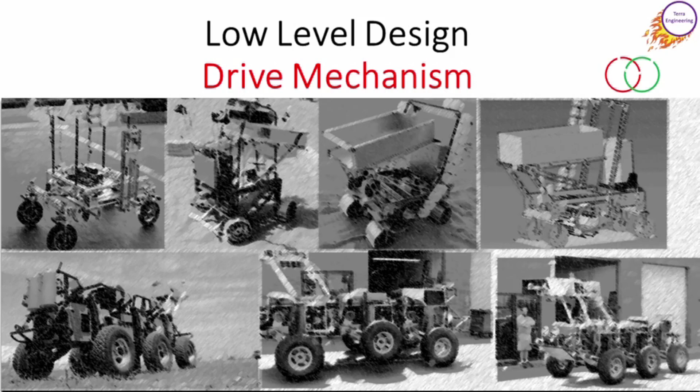This is an introduction to the internal drive system for an omnidirectional drive BattleBot.

The system I designed is based really off of two parts. The first is this 6384 motor. I have a number of these sitting around, and the second is this, which is the internal piece of a clutch system I had for a much larger robot. It was actually around 4,000 pounds. Now this started out at 8 pounds, and I put it on the lathe and turned it down to see just how light I could make it, to see whether it might be viable. And I really did remove a ton of weight. So I'm going to try, based on this clutch system, to fit the design around it.

All right, let's get into CAD. This is SolidWorks, obviously. There's the two motors, twin motor design. They say they're 4,000 watt, but it's Chinese 4,000 watt, and if you know what that means, you'll be lucky to get a momentary peak of 3 kilowatts out of them. But that's plenty. Two 15-tooth 1.5 module gears at the front.

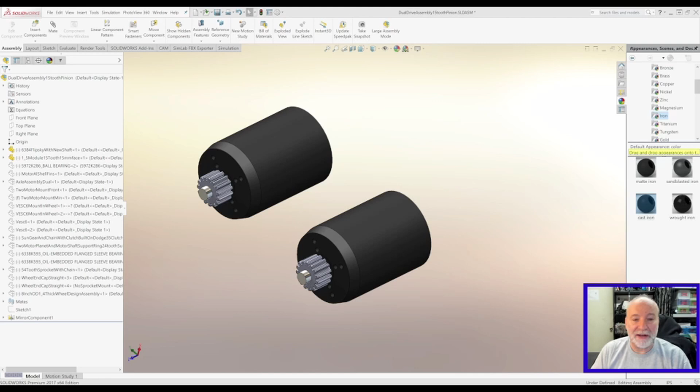And these are outrunners, so the first thing I have to do is add a support bearing in the back. Now that doesn't fix everything. The magnets are still cantilevered, and under high G loading they could impact the stator. There's not a whole lot I can do about that. There are motor designs that have bearings front and back. I'm just going with what I have.

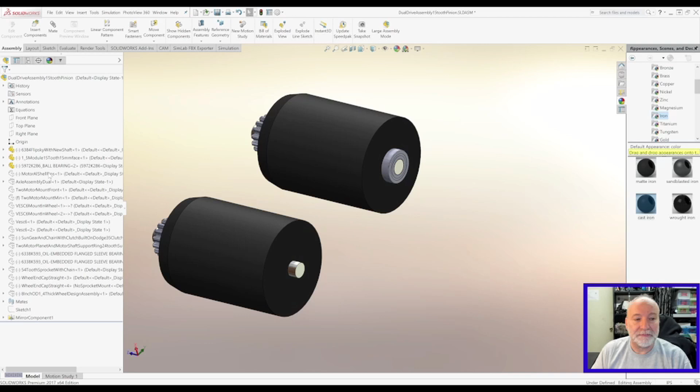I had this idea a number of years ago to turn an aluminum tube and make an aluminum heat spreader with fins for motors for outrunners. This is really, if you think about it, just a multi-start thread, and I can do it on my CNC lathe, but it would take time and effort. And right now it's an idea. I don't know if I'm going to have time to complete it.

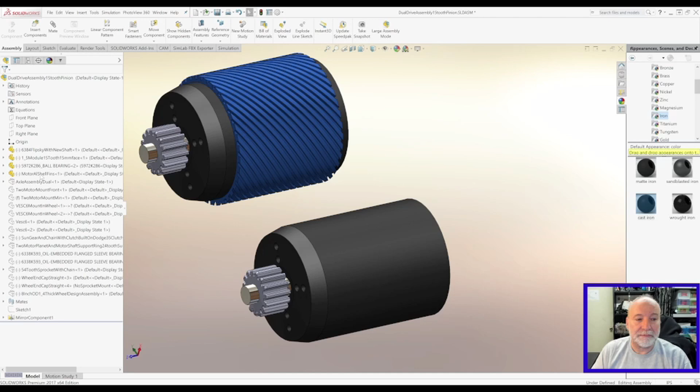The next part is the internal axle. This is made of 4130 DOM tubing, and I have a bunch of this laying around. That's the reason it's picked. 1.25 inches in diameter nominal.

The front and back pieces are really registration pieces for the front and back structure. I have two types of this, a thicker and thinner. This is the thicker. I don't know that I'm going to need that much strength. Basically, this needs to be light enough that I can afford heavy armor on the outside. And putting extra mass inside here means I'm going to lose protection on the outside. That's the trade everybody makes.

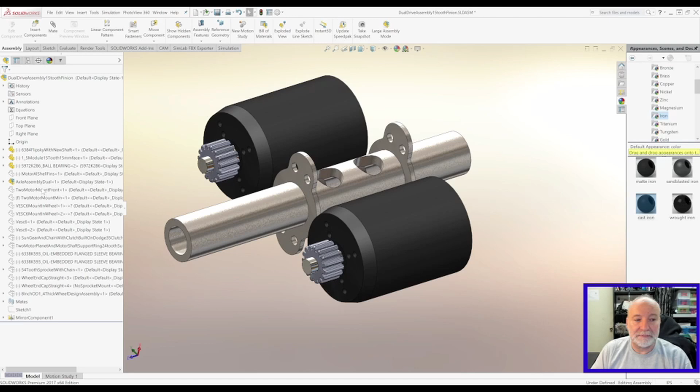This is the structure that holds the two motors on the front. As you can see, there's a machined out section to allow the wires to escape. This is made out of 0.89 inch aluminum 6061 plates that I have. There's standoffs here for the gearing.

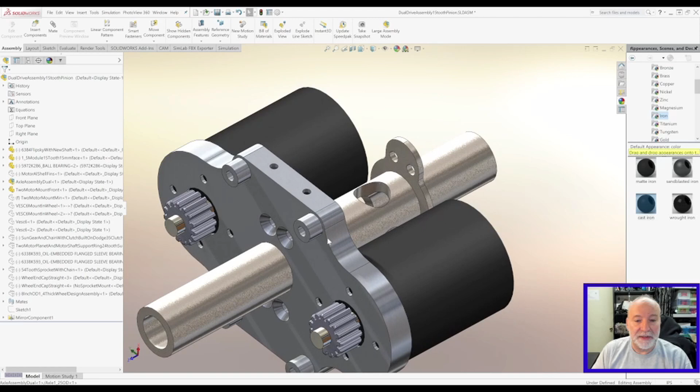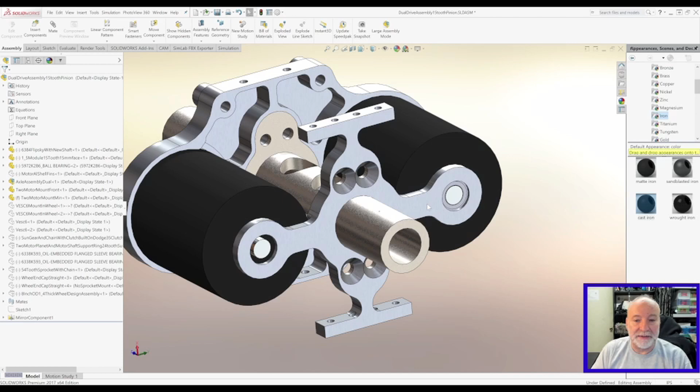Next, the back. This is really a minimum structure. There's very little here. The idea is this load in the back is not very extensive. If you need maybe to be able to support 200 or 300 pounds of load at the back, by structural analysis this will do it. This also supports up top here the mounts for the speed controllers, one for each motor.

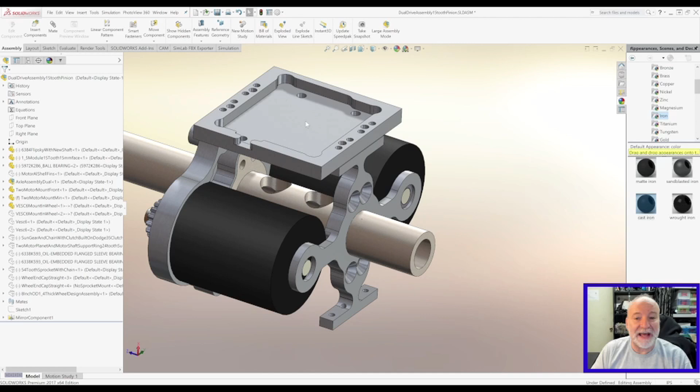Speaking of which, there are speed controller mounts mounted two different ways. For the design, I started looking at things. I don't know until I start futzing with it whether the wiring is going to work or not. In this case, the speed controller is mounted facing out, which puts it farther away from the center. In the other case, the speed controller is mounted in, which puts it closer to the center, but there may be clearance issues. You look at a VESC, this is just a brick to represent the VESC.

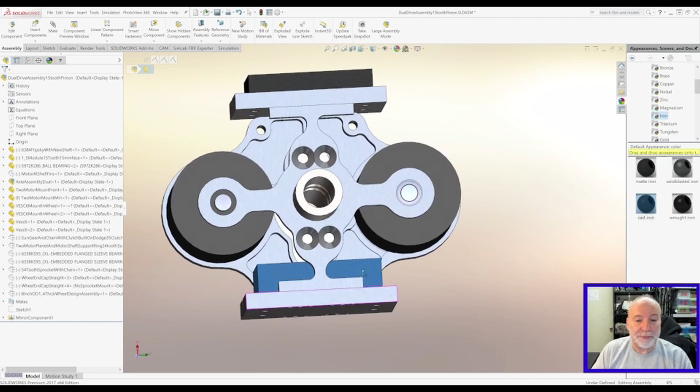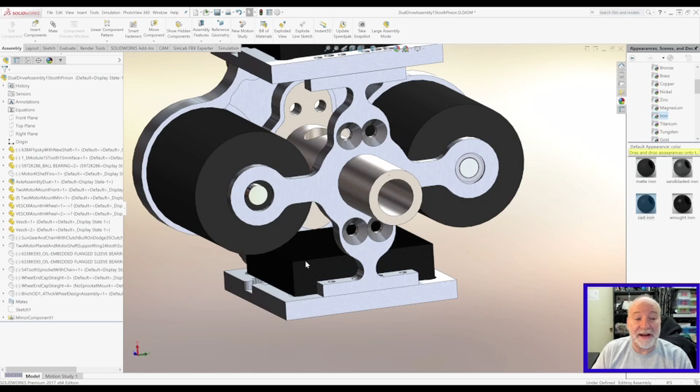When you look at them, the clearance distance between the motor and the edge of the VESC - remember there's wires that come out the side of the VESC and they have to turn around and get out the center axle. So obviously with an outrunner, if it's spinning and it touches a wire, you're going to have a really bad day very quickly. So we'll find out whether I can get the wires to go or not, and if we can't, then I'll have to go with this larger design here.

This is the first stage of the gearing system. This is a combination of gears that transmit torque to this center gear and then through a friction clutch transmits it to the sun of a chain planetary.

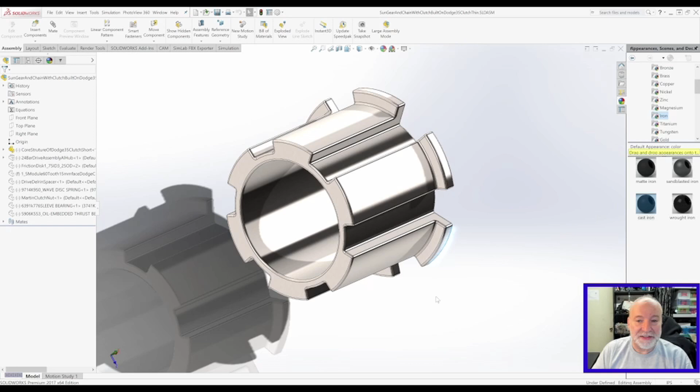Now I'm going to switch here real quick. You might recognize this - this is the center of that clutch device that I showed. And so this is the build up of the first gearing assembly.

Now these bars are 3/8 apart, 375, and that's a number 35 chain. So this piece is effectively a chain that's held in an exact circle. That's the center, that's the planet, the sun of a chain planetary. I've always wanted to make a chain planetary, so this is my excuse to do it.

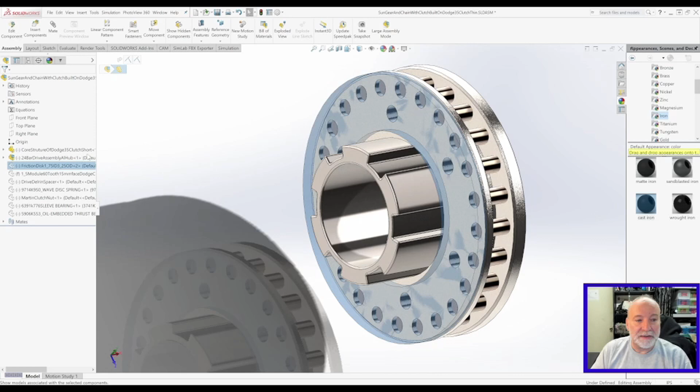This is connected through a friction disc - this actually, I have these from the original clutch design - to a gear, the center gear. Now note that the center gear is hollowed out.

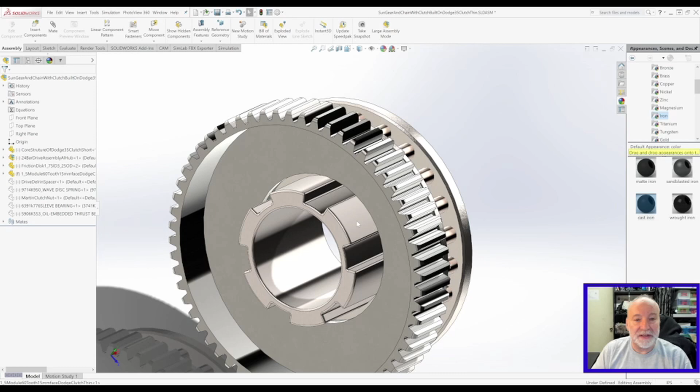This represents the edge of structural analysis for this piece. This is how thin you can make it to match the amount of material left in the gear with the strength of a tooth. There's no use having an excess amount of material in the center of the gear if your tooth is going to fail before the gear fails.

So I did a lot of iterations of structural analysis to show that this is sufficient. There is a spacer made of Delrin in here that just keeps everything centered.

Shown here, there's a wave disc spring. These are basically linear springs that put pressure between two flat plates. In this case, you can stack these springs 1, 2, 3, 4 thick to get the level of load that you need.

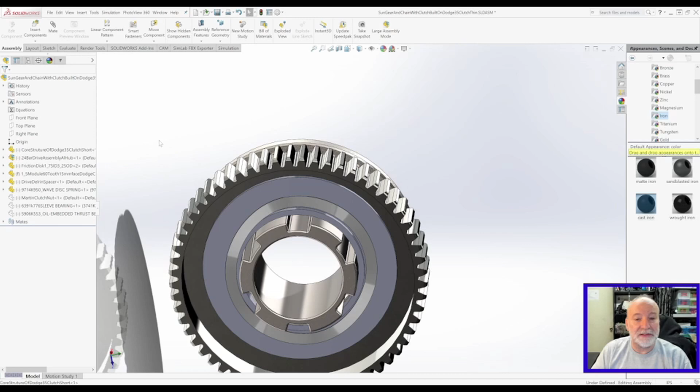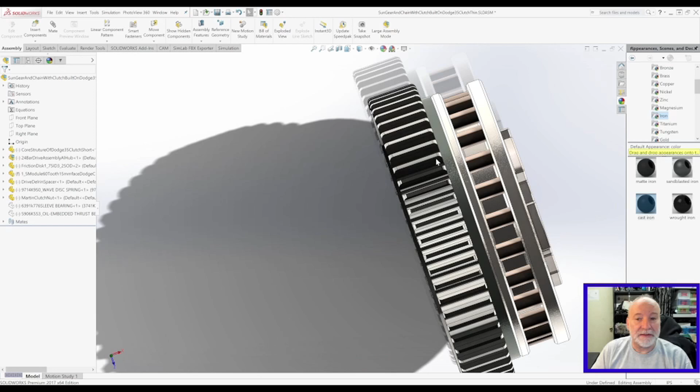This is the nut from the clutch assembly that I had. I had to spin this down a lot, but it will load those wave springs into this friction disc, and it keeps the transmission of torque between the gear and the sun of the chain planetary.

All of this spins on an iron copper bushing, and there is a thrust bushing at the back to keep it from impacting the other structure.

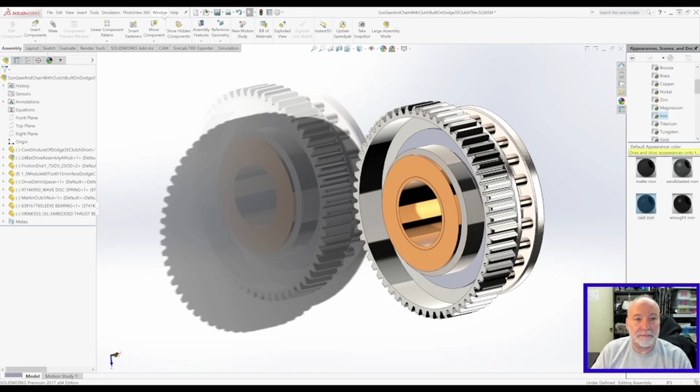So we've gotten the torque from the 15 tooth to the center gear, from the center gear transmitted through this clutch to the sun of the chain planetary.

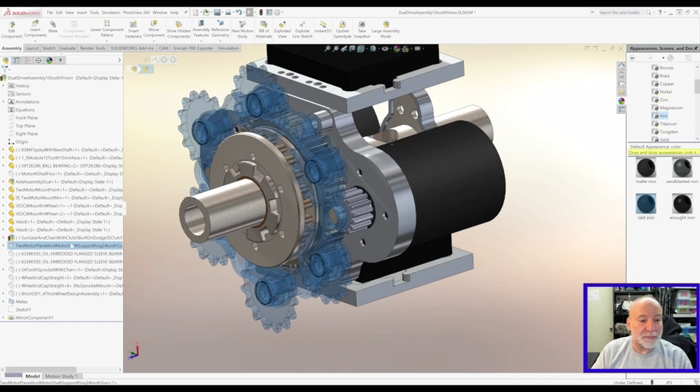Now let's look at the planets. This is where I ran into a compromise on how much gain or gear ratio I could get out of the chain planetary. I wanted to get a bit more.

The problem is that I want to be able to disassemble this thing without taking all the pieces apart. That would just be a nightmare. So if I don't want to have to disassemble every planet every time I take it apart, then the planets can be only so big, because the mount bolts here that mount this structure onto this structure have to be accessible when the planets are in.

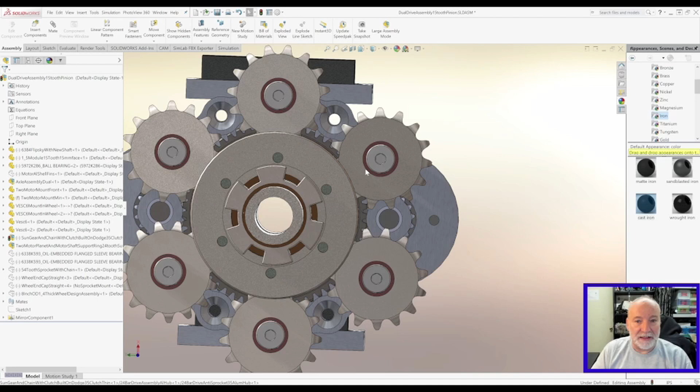Now I went about as big as I could, and I think there's going to be some jiggling involved. You have to put the bolt in and then jiggle the planets around a little to get them lined up so that the bolt will slide in. But I'm trying to get as much gain as possible.

The outer tire rides on the axle on these bronze bushings, and of course there's one for the front too.

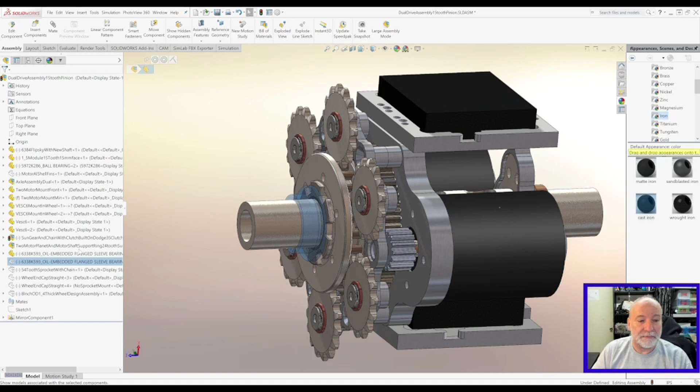And here is what you would call the outer portion of the chain planetary. This would be equivalent to a ring gear.

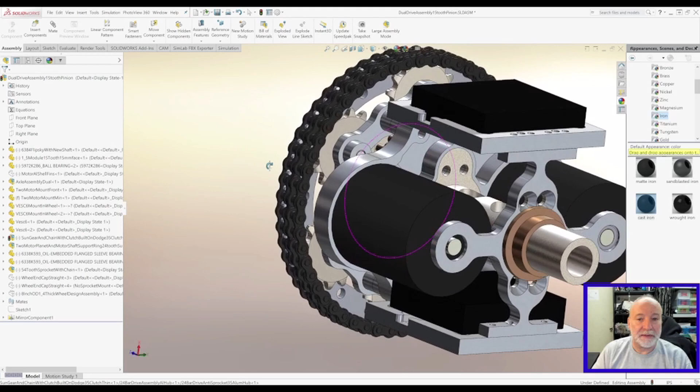So this small piece, one of the reasons I picked chain planetaries is they can take an enormous amount of load, and they don't really weigh that much. The reason is, for instance, this disc here is made out of aluminum. It has 54 teeth that are always engaged. So unlike other gears that only have a few teeth engaged, this one is going to be virtually impossible to strip.

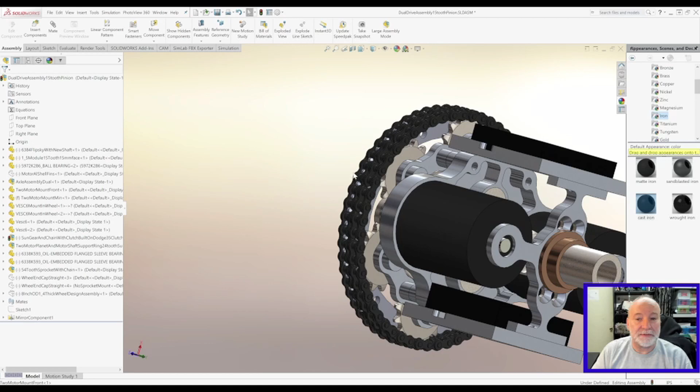So the planets are fixed, the sun spins, and as a result the outer is going to drive the wheel. So let's show that. There's the wheel interface.

This system right here should be able to be built up and assembled as a complete set. And I would keep these set up as spares in that way.

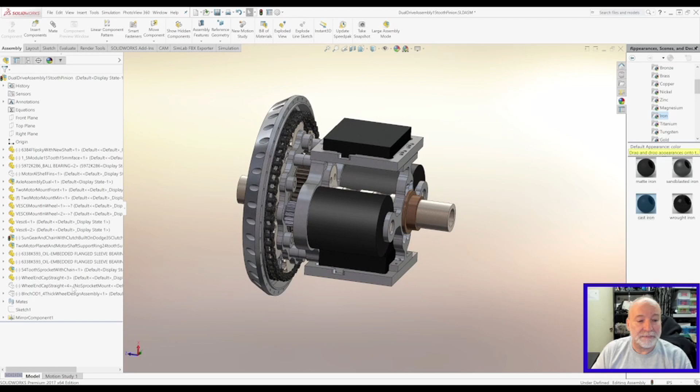And the last two pieces I want to show here are actually going to be welded together. Well, obviously the tire's not welded, but there's a central cylinder made of aluminum, and the back is just a free-floating end piece like the front, except that it doesn't connect to anything. It's similarly designed. I used the same structural analysis to prove out the strength of them.

The tire itself, in my iterations, what I did is I went around and found a bunch of go-kart tires that were about the right size as I wanted, and I ordered one of each. It turns out one of them had the perfect inside diameter. So it fits this 8-inch outside diameter aluminum tube, and the inside diameter of the tire was about 7.9 or 7.95. So there'll be some grab on it when I try to put it on.

I tried slip fitting one of the tire pieces over some tube that I had, and it looks like it's going to do well. And then I'll end up using some form of fastener through the tire to make doubly sure that it doesn't spin.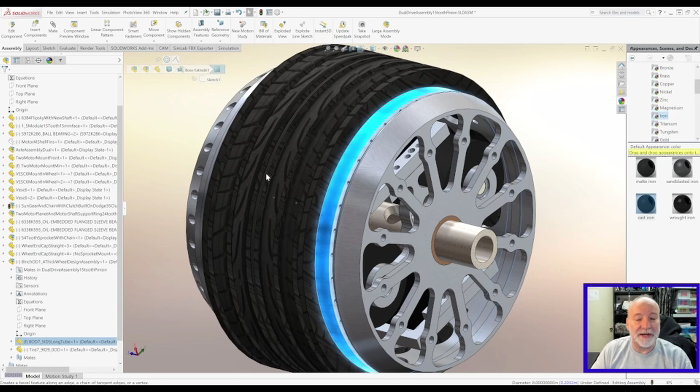And when this is all assembled like this, what you're going to have is, I'm thinking, a pair of wires coming out one side, which is the power plus and minus, and then a set of wires coming out the other side, which are the serial communication wires to the speed controllers. Now those serial communication wires are going to have to go to wireless receivers, and I've looked at a couple of those Bluetooth systems that look very simple.

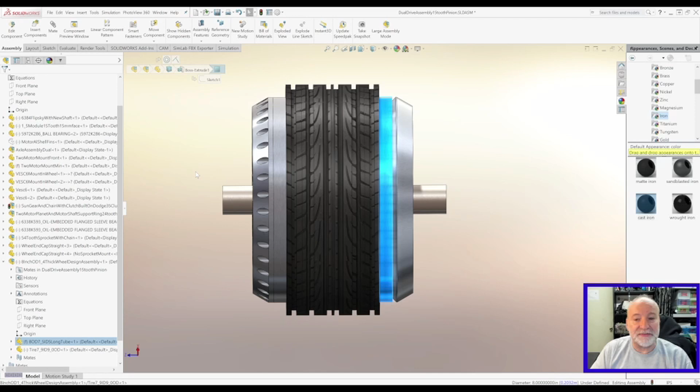And that has to float. Obviously, if this is going to be on an omnidirectional drive, then the wiring, the power wiring has to go through some sort of slip rings, or you could do wire wrap, but if you did wire wrap, it would limit the travel. Right now I want to try and see if I can do brushes to get the power across. So that's the basic design.

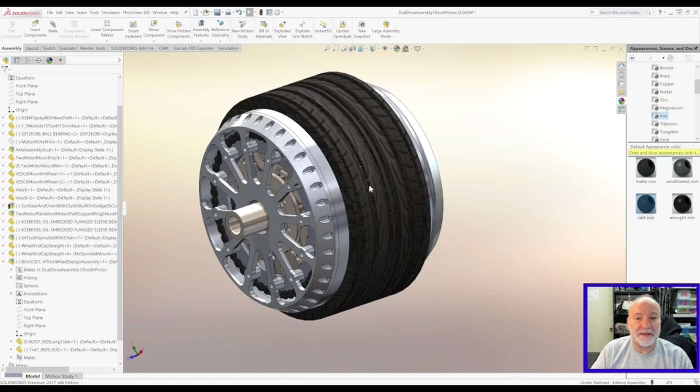I'm sure there'll be little mods as I go along, but we're going to try and mock one up and see how it works.